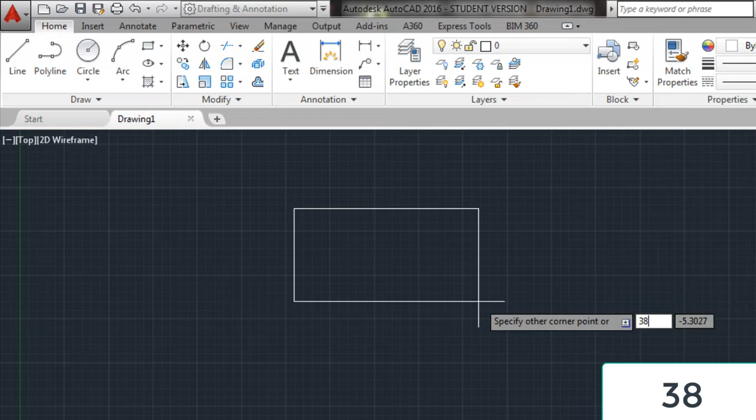We'll begin with its front view. Draw a rectangle of 38 mm length and 38 mm breadth, probably the square. Now draw another rectangle of length 42 mm and 10 mm breadth. Now move it to the top of this rectangle.

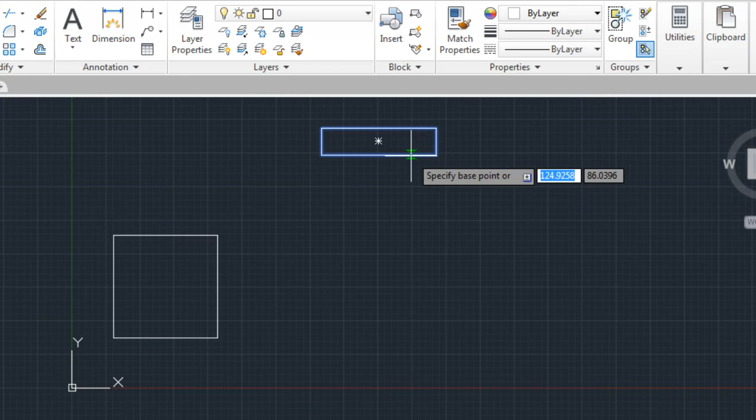Select the object and type in M and hit enter. Then select the base point and specify the destination point. You are done. Now it's time to draw some construction lines.

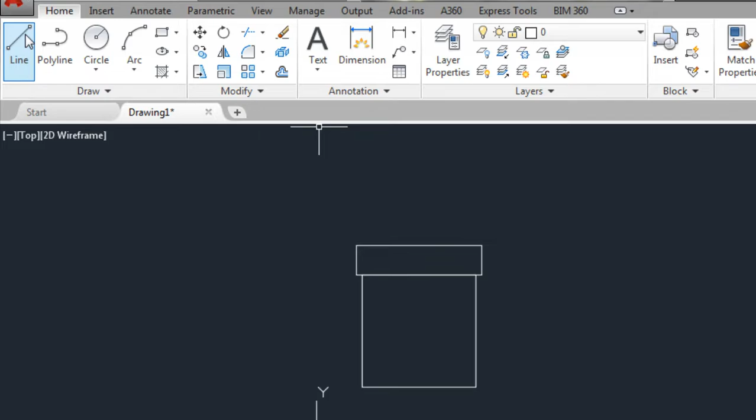For that, select line type in properties panel. Select other, click on load and select ISO dash. Click OK and again here. Now select the line type. Draw a line from center of top rectangle to a distance of 9 mm and straight to this line.

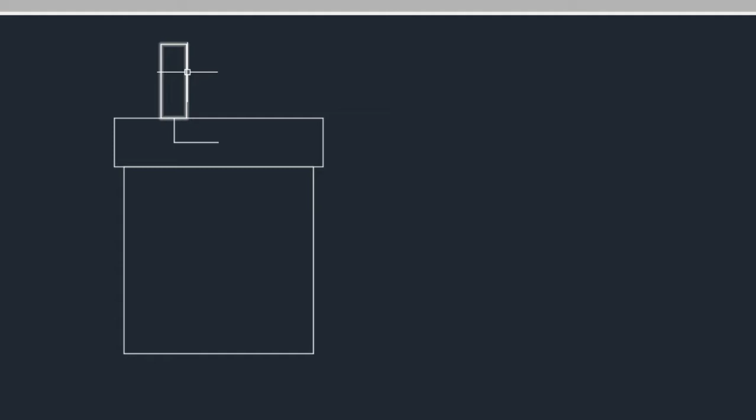Change line type now. Select a rectangle and specify length of 5 mm and height as 15 mm. Move it and place at the top of this rectangle straight to this line. Perfect. And now select the rectangle and place the mouse at the center of the top line.

Select convert to arc. Hover the mouse to specify the direction and type in radius as 2.5. Mirror the object. You are done with front view.

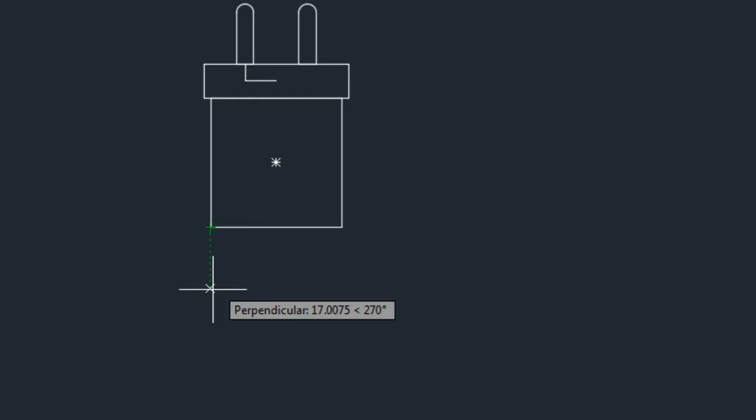Let's draw top view. Select rectangle, choose fillet in the command bar and specify radius as 3 mm. Now trace this line and specify length as 38 mm and breadth as 27 mm. It's time to draw another rectangle of length 25 mm and breadth of 22 mm. Before performing that operation, give fillet value to 0 and then go ahead.

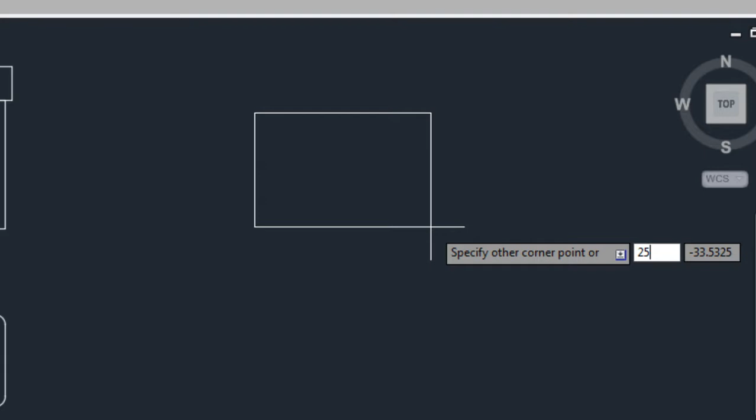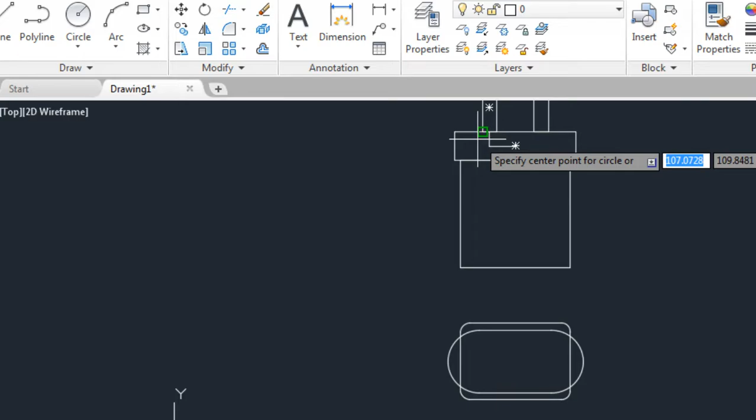Now convert the sides into arc as we did before, but the radius now is 11 mm. Then draw a circle of radius 2.5 mm by tracing the above front view. Now mirror it. So done with the 2D sketch.

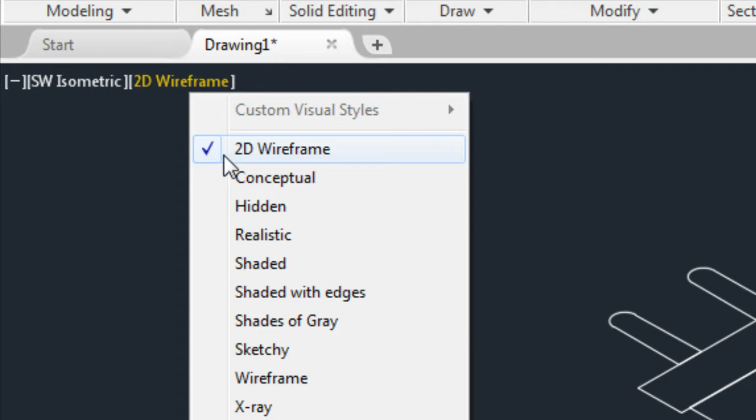Switch to 3D modeling. Here from the status toggle bar, select Southwest Isometric and select Shaded in Visual Styles for better view. Now pay attention here. Select Press Pull in Modeling panel, which is in Home tab.

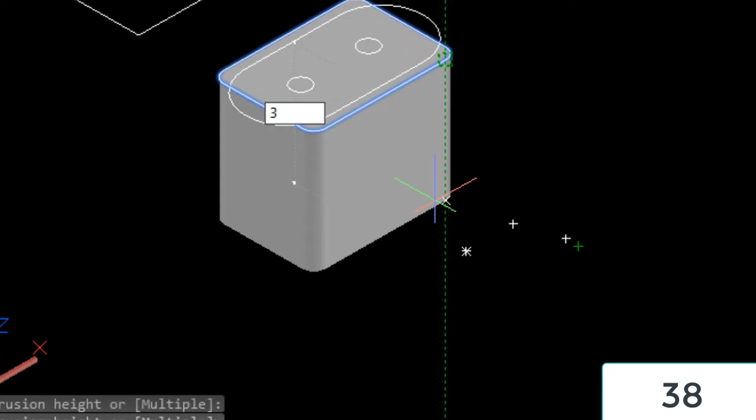Check the rectangle that has been created with fillet. Hover the mouse downwards and then specify height to be 38 mm. Repeat the command for the circles but in opposite direction of height 25 mm.

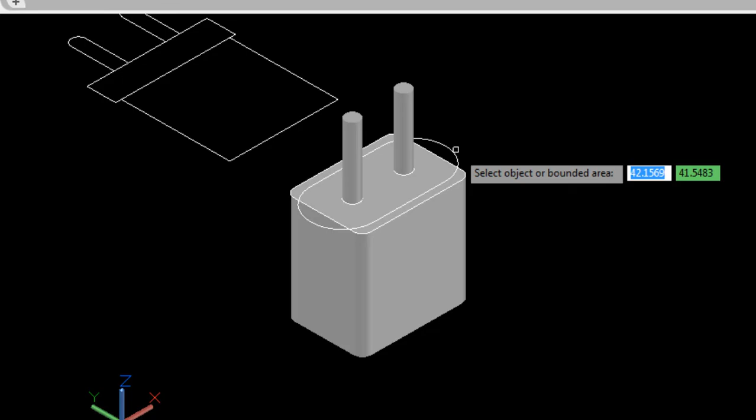Again repeat the command for this object and specify height as 10 mm. Now switch to solid tab in here and select fillet edge. Then specify radius as 2.5 mm and select these edges and then press enter twice.